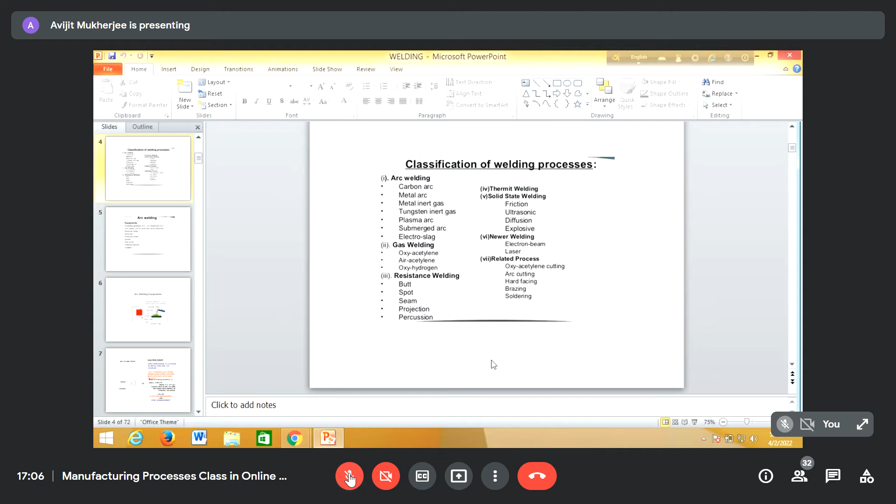Before discussing, I would like to mention that in the chat box I am writing the names of books. All the books of manufacturing processes, as I had mentioned earlier, contain welding, but there are some good books only for welding, right? H.J. Little is one of the good books.

Then again, Welding Technology by J. Davis. And another good book, Welding Technology by Parmar. So there are three good books on welding, along with many others. But for the time being, you may not go through Parmar, because Parmar is basically mathematical. There is various welding mathematics related to welding current requirement and so forth. So Parmar we shall not discuss in detail, because that is beyond our scope at the present moment.

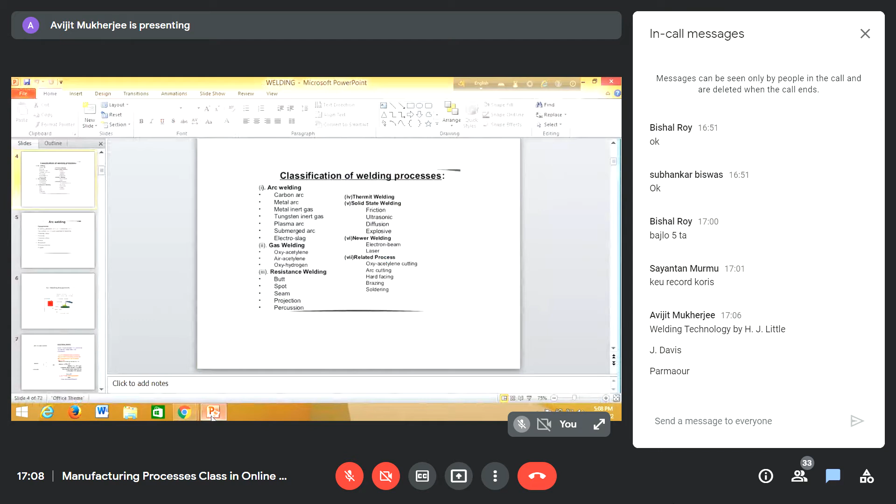Now we are again returning. So I think this slide is available. Are you getting it? Yes, sir.

So we had mentioned it not in a tabular form, but just observe the arc welding. Previously we had discussed gas welding, number 2. So what are the different techniques? Oxyacetylene, oxyfuel. So in oxygen-acetylene, acetylene is the fuel; in oxygen-hydrogen, hydrogen is the fuel. Oxygen is a supporting gas; oxygen supports combustion. If we don't have oxygen, air may also be used, but that is not good quality. So this is oxyfuel welding.

Electric resistance welding. We had discussed spot, seam, projection, butt, and percussion welding. Percussion means flash butt welding. This is what is known as upset butt and flash butt. Now there are many other related processes. This is not welding, but utilizes the oxyfuel flame. So what is that? Cutting. Related process means instead of joining, cutting is initiated, basically for ferrous metal, as we had mentioned yesterday.

So oxyacetylene cutting, or we may also have arc cutting, brazing and soldering. We shall not discuss arc cutting or hard facing for the time being. Brazing and soldering are again joining processes, so that will be discussed. Some newer techniques like electron beam welding, laser beam welding, then solid state, these are also newer: friction, ultrasonic, explosive bonding, diffusion bonding, all these are various advanced technologies. Then submerged arc welding, those will be discussed.

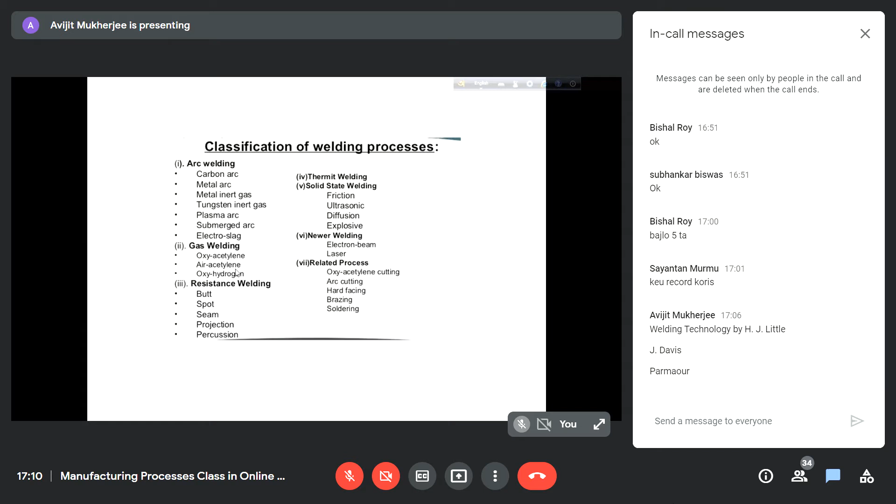Now for arc welding, perhaps you are at least familiar with arc welding, because during your laboratory, most likely in the first year workshop, or in second year first semester, there was a workshop on welding.

Yes, sir. Second year. Second year, first semester. First year first semester? No, second year, sir. Second year, first semester. Okay. So welding was discussed at least in theoretical mode. In online mode, yes. Online, but I think arc welding was discussed.

Yes, yes. Now, in that case, arc welding.

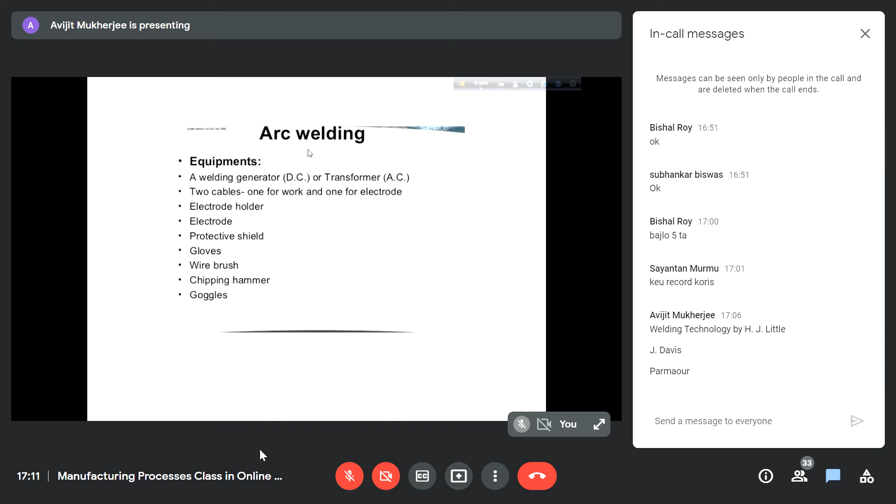So again, as we had mentioned, heat source or heat is a basic minimum in case of welding, right? So in arc welding, how is heat generated? Again, as the name suggests, electric. This is arc, obviously obtained from electrical sparks, right? And in using electricity, we may have electric resistance welding, where the concept is something different: heat is H equal to I square RT. But here, how heat will be generated, that we shall discuss.

Again, as it is an electrical source, we may have either a DC set. What is DC? Direct current, right? And one is a transformer, AC transformer, alternating current, where there is no fixed polarity. Alternatingly, plus minus, these polarities are changing. But in DC, direct current, there are two fixed terminals, positive and negative. They are not changing. Okay, and how heat will be generated, all these will be discussed.

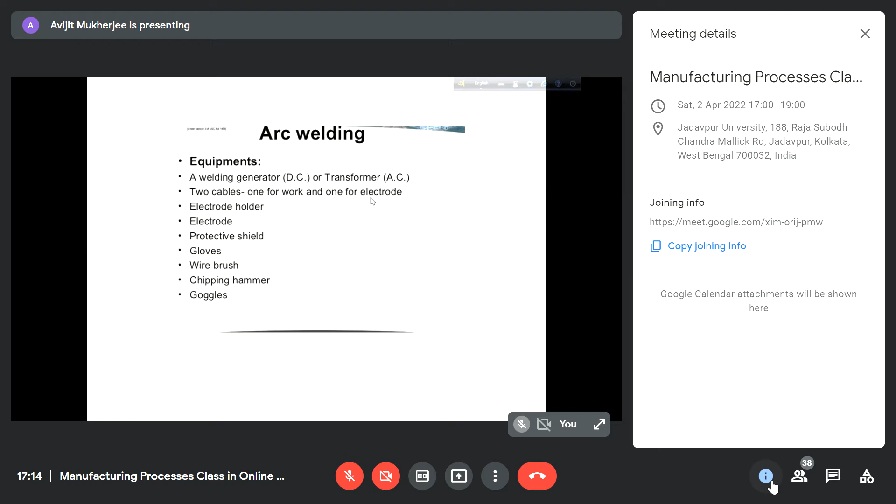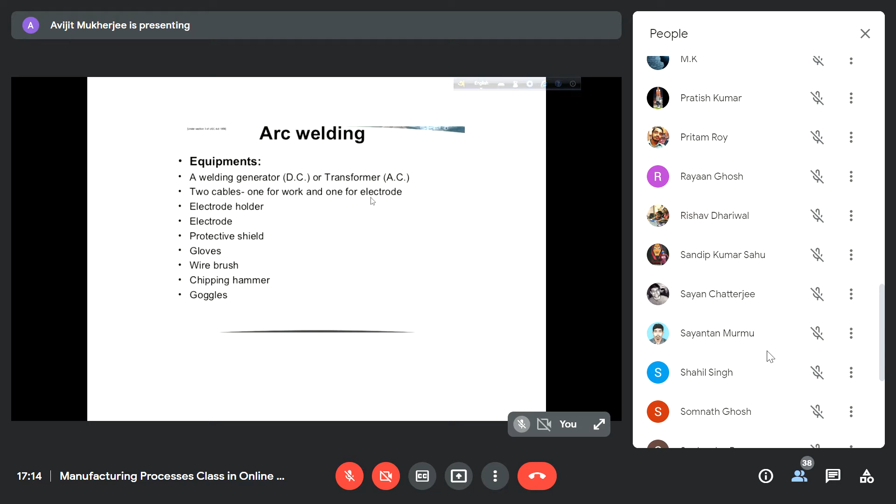Now here the concept of electrode is something different, not the positive terminal or negative terminal as the concept is utilized in electrical energy. But electrode in arc welding particularly, and sometimes in gas welding also some electrode rod is used, is nothing but filler metal. As we mentioned yesterday, we may require some additional material to be deposited, depending on the gap between the two pieces, which depends on the edge preparation. Edge preparation depends on the strength requirement or types of joints, geometrical shapes, sizes. So here electrode is that extra filler material. So we require two cables, one for the electrode and another for the work materials.

We must have an electrode holder, because the job will be held on a work table. Jobs will be clamped. You need not hold the job using any tongs, but the electrode should be held manually. If it is robotic welding, obviously robotic arms will grip all these. So as we require an electrode cable, we must have the electrode. These are also very important devices in welding.

These two, protective shield and gloves. This protective shield is a blue glass through which you should observe the welding, because you should not look directly at the weld area, particularly the arc weld area, with your naked eyes. Why? Because the rays generated are very dangerous. They contain ultraviolet rays, infrared rays, which may damage your retina. So the protective shield, also known as shielding glass or blue glass, is a specially prepared glass. Not only is the color blue, but it is specially designed so that X-rays, UV rays, infrared rays can't penetrate.

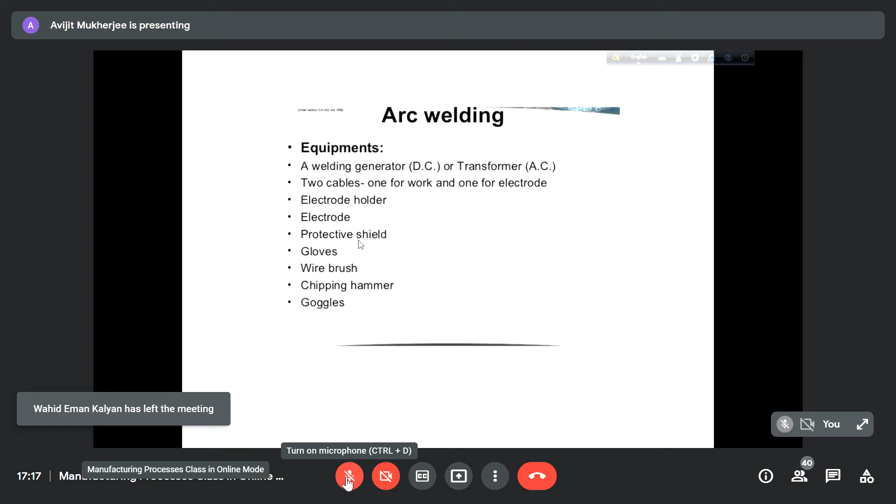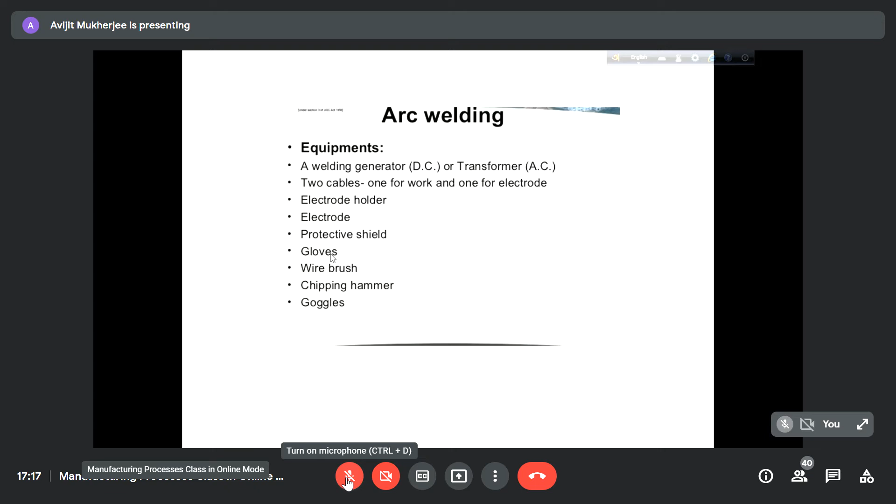And gloves are also used, and aprons, because sometimes you may feel an electric shock, though there is a minimum chance. Why, we shall mention again, but gloves should be used. Also there are various burrs and corners, sharp edges of metal pieces. So gloves are an essential minimum. And in welding and fabrication industries, where welders are operating continuously throughout the day, they must wear apron, gloves, all these.

If you visit some fabrication industries, you will observe, just like in today's COVID scenario where doctors are all the time wearing PPE, personal protective equipment, with all body parts completely covered, similarly in welding and fabrication industries all the body parts of the workers are completely covered.

Why? Because due to arc welding or any other welding, various fumes and gases are evolved. Not only the rays, red rays, X-rays, UV rays, but also obnoxious gases are formed. That is very harmful not only for the lungs but also for the skin. Prolonged exposure to those obnoxious gases may harm your body, even skin cancer. It may lead to various allergic conditions, irritations, and even cancers. So that's why protection in the welding industry is very, very important.

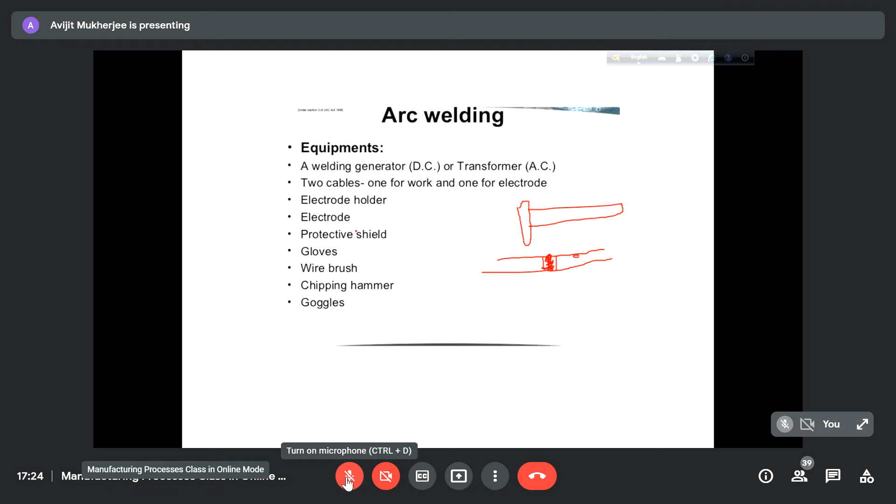So after cleaning, chipping and removing these fragments, go for the second pass. Again, break the chips. Again, go for the third pass. In this way, depending on the section thickness or strength requirement, a number of passes may have to be given. And every time a single pass is done, it should immediately be followed by chipping. Why? To remove the oxide scales. That's why the chipping hammer, goggles, protective shield are required, all for protection.

One cable is connected with the electrode. This is the electrode holder, and on top there is an electrode. Electrode means a rod. This may be a bare wire, meaning without any coating material, a bare wire electrode. Or generally some coating material, flux coating, is used on the electrode; we shall discuss it in detail. Just like agarbati, dhoop, which you are familiar with: the bare wire is the wooden stick on which coating material is deposited. This is the electrode,

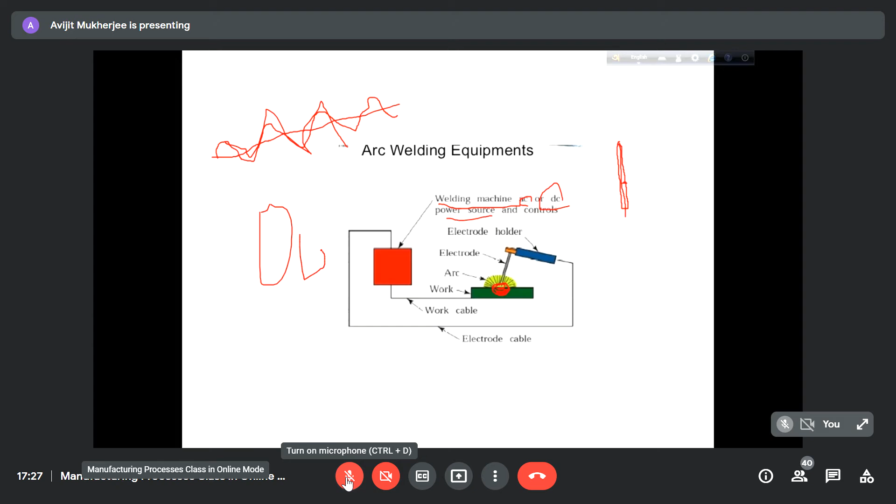Like in gas welding, we have two cylinders, one oxygen cylinder and another acetylene or other fuel cylinder, two hoses, a mixing chamber, and either a cutting torch or welding torch. This is ignited and heat is generated. But here, this is the scheme.

Now, question is how, as in the previous slide, we are observing some arc. So as soon as these two cables, or say work and the electrode, are struck and immediately separated by a small distance, air gap. Are you getting what I would like to say? Say this is the workpiece and this is the electrode. So they are just struck, touched. Okay, struck. Yes, sir. And immediately make a gap, air gap.

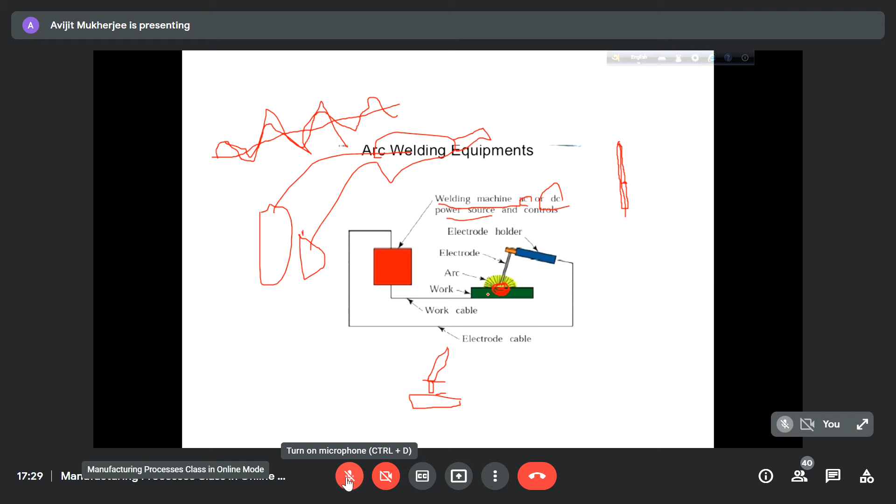So through this air gap, arcing will be established, arcing will be continued, arc will be established, right? Yes, but sir. Question is how this arc is established. You are striking the two electrodes and immediately separating the electrode, maintaining a very small air gap through which arc is established. Now, there are various theories behind this.

One theory is electrical theory, which is not shown here, but say this is the second theory. First theory is electrical theory, not electron, electrical theory. Okay, electrical theory. And another is electron theory. Now, in electrical theory, first one, though it is not mentioned here, you go through any books, you will understand. Now, in electrical theory, what is happening? What is that theory?

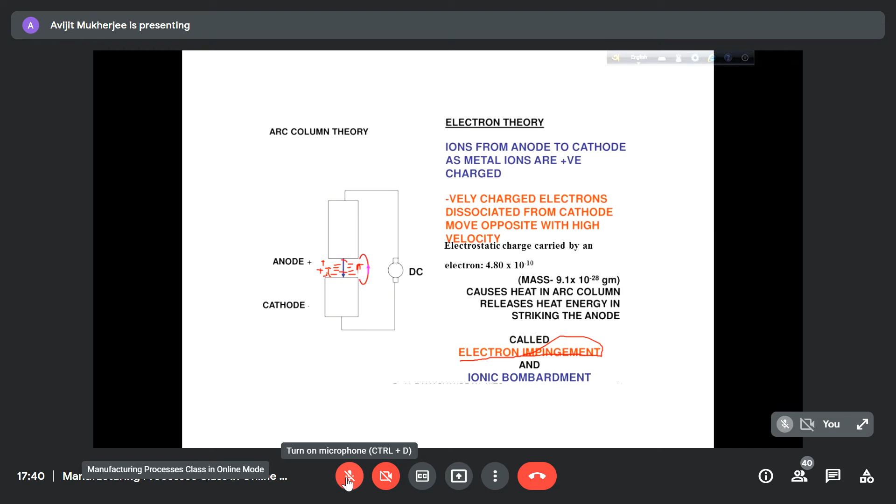Similarly, some ions will also be liberated, comparatively lesser in number, at the anode surface, and being positively charged particles, they will be attracted towards the cathode surface, creating the outer envelope, outer path. This is the inner column, electron column, and this is the outer envelope. They will also collide, also traveling, also attracted, also colliding with the cathode surface.

And this collision, ionic collision, is named ionic bombardment.

Now this is the science. Now, how is heat generated due to this? Electrons have a very small mass, 9.1 into 10 to the power minus 28. When they are attracted or traveling with very high velocity, and are colliding, then this kinetic energy is given, for a single electron,

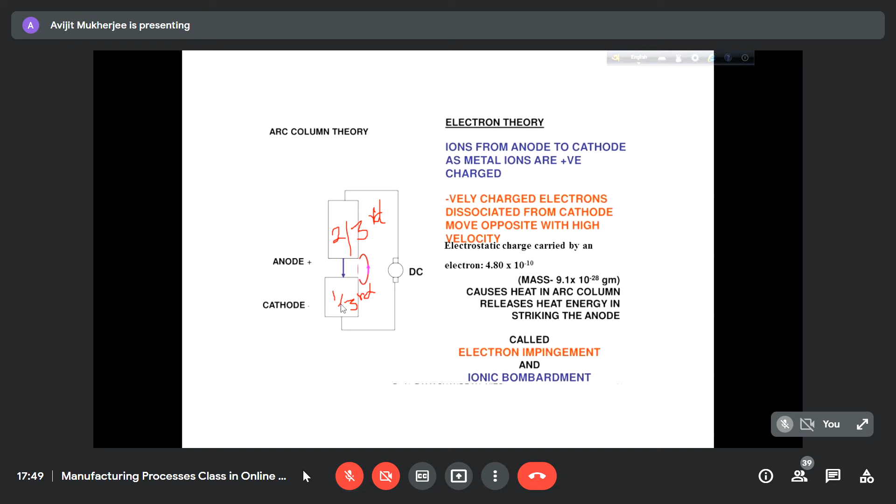Based on this, say this is the work, a job, and the job is connected with the positive terminal, positive pole. Say this is the positive terminal of the DC and this is the negative terminal of the DC, and the electrode is connected with negative polarity, negative pole. Okay, this is the job or work, and this is the electrode.

Now if these are the terminals or polarity, job is connected with the positive pole, that is anode. Electrode is connected with the cathode terminal. So where will the maximum heat be generated? On the work surface. If maximum heat is generated on the work surface, what will happen?

Metal will be melted at a rapid rate, right? And as soon as the metal is melted, the electrode will also be melted, getting the heat, and the droplets will be deposited here.

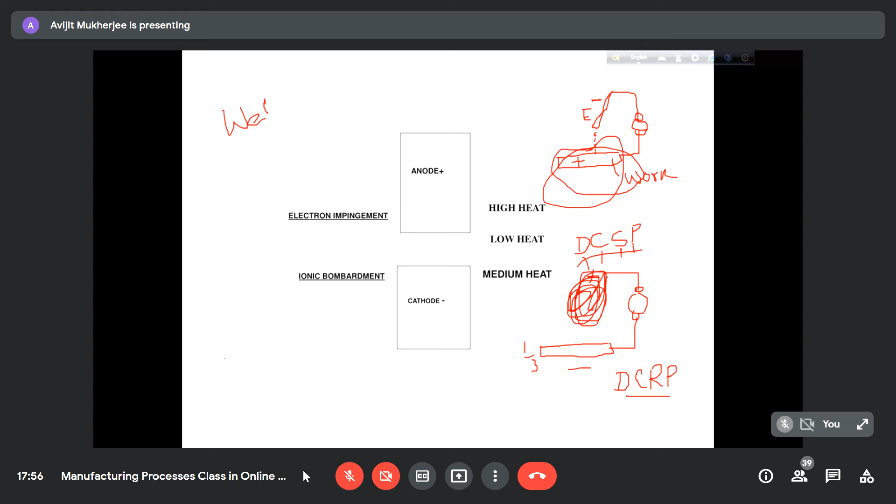There is another concern, that is weld position. So what is weld position? There are various weld positions, like vertical, horizontal, floor, also called flat, and roof welding.

Say this is a surface, a wall. So this is the floor, a three-dimensional view, this is the room. So I am welding on the wall vertically. So that is vertical welding.

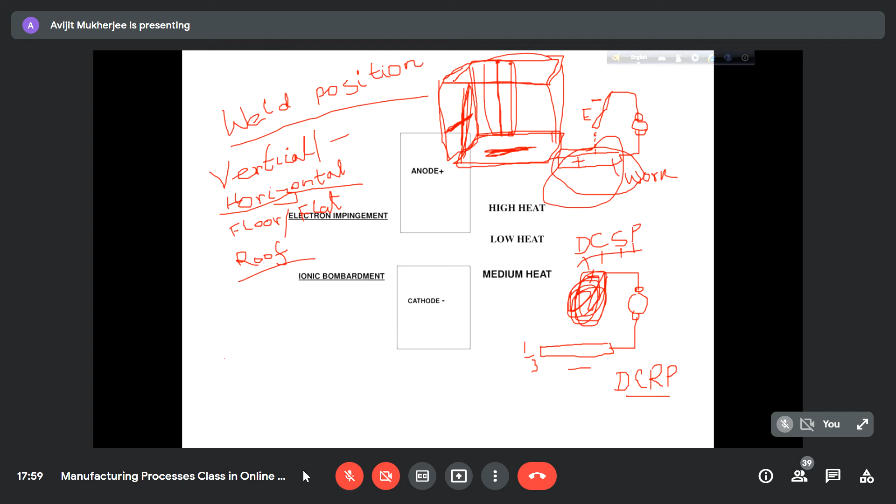This is the roof. You just observe your roof where you are sitting right now, look in upward direction, your roof is there. And a crack has been initiated at the inside roof area. So how to weld here?

If you connect your roof with positive terminal - say metallic room, the roof is connected with positive polarity terminal - maximum heat will be generated on that surface, and massive melting will take place, and the total metal will immediately come down due to gravitational force of action. Nothing will be deposited; metal will be deposited very slowly, very difficult.

So what is the suggestion? It is suggested if sometime roof welding is to be done, then tilt the object in an upside down manner. Are you getting the point? Tilt the object upside down - now it is like horizontal or flat, so things will be deposited very nicely.

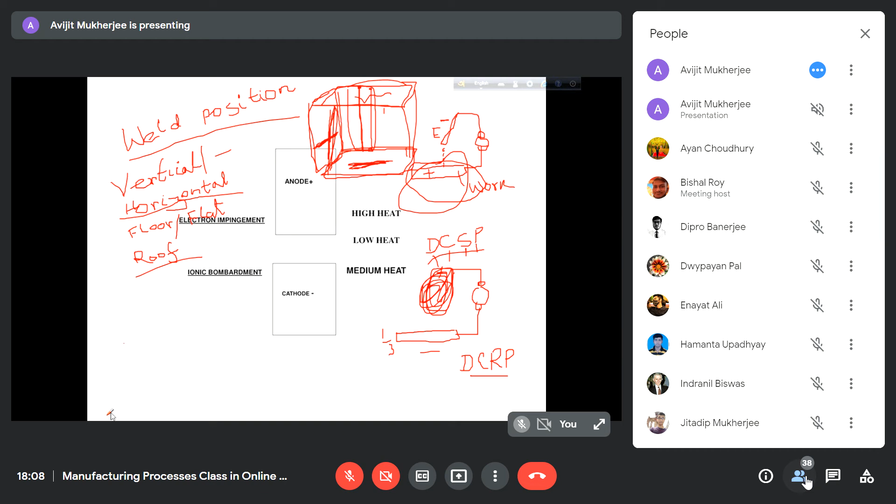But the only advantage is that in a very sophisticated factory, you may have all sorts of facilities, power source, all these. Still, you may have to use a motor generator set when the question of polarity is concerned. That is the only technical advantage of using a motor generator set. If it is connected with roof welding, you must go for a DC motor generator set. Or for thin foil, large thickness of job, high melting point, you can't avoid it. So these are the advantages as well as limitations.

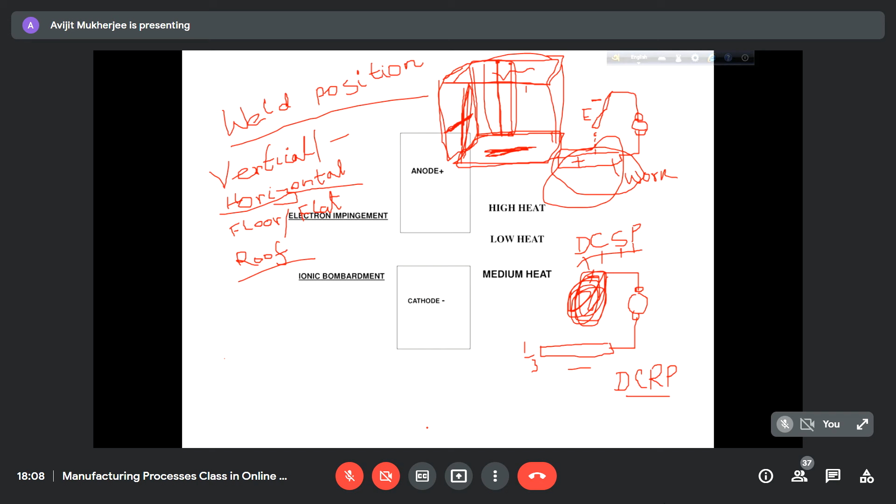Only 1 minute, I just am.

So these are the advantages and limitations of AC and DC motor generator sets. Here, what are the advantages? DCSP, DCRP. So this is the major advantage of using a DC set, along with many others, all self-explanatory. So go through any book and distinguish between AC and DC welding power sources.

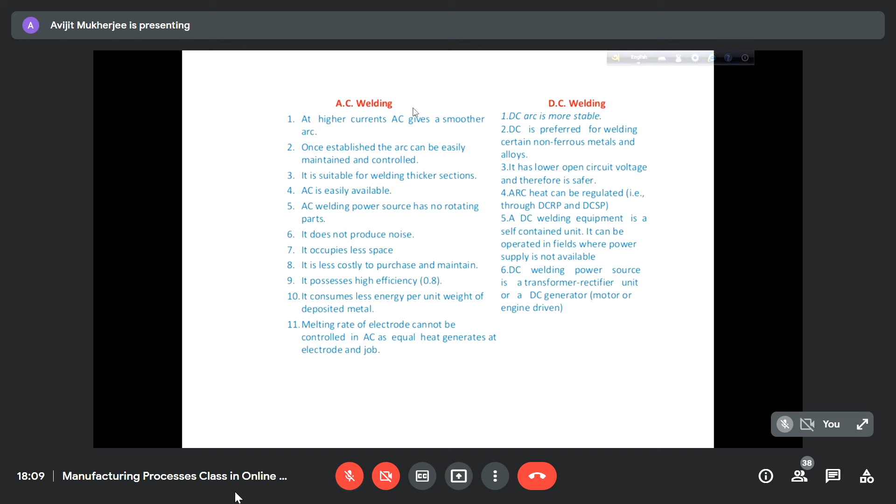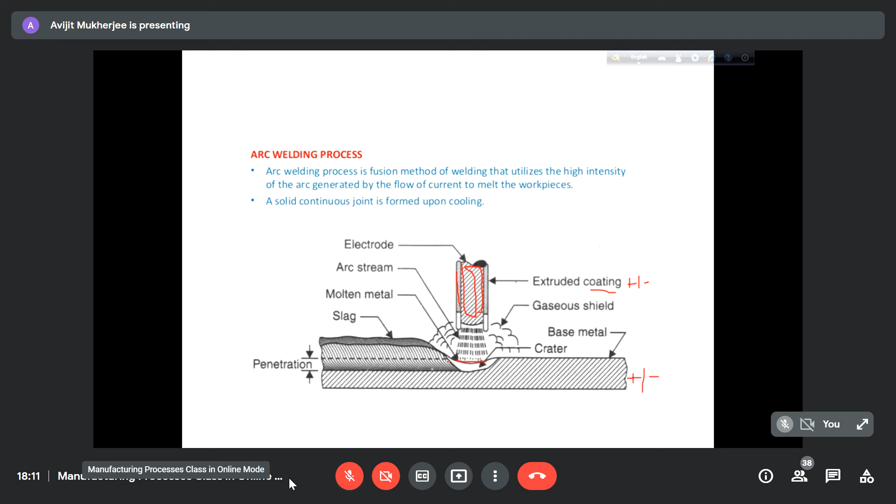And due to this arcing, a tremendous amount of heat will be generated, and by digging action the metal will be melted and a crater will be created. And molten metal will be deposited. This bare wire, a metallic rod, will also be melted and deposited in this pool, in this crater. So this is the molten metal deposition. Gradually, this thickness will be enlarged,

and this pool of molten metal, the crater, is covered by a gaseous envelope or shield. Why is this gas evolved? Due to the burning of the coating material. So gas will be evolved, and it will create a protective envelope. This gas shield is also very important. As this shield creates a barrier, heat will be dissipated from the crater or molten pool at a very slow rate.

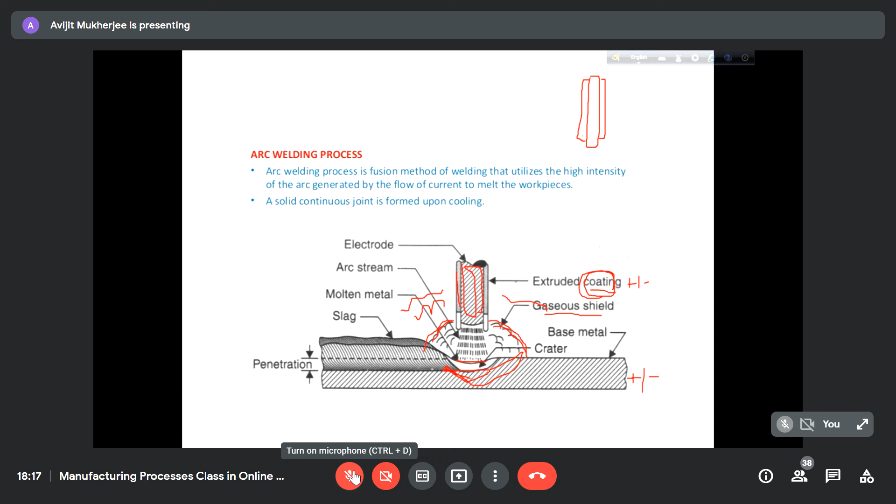So if the molten metal is unprotected, then immediately oxide layers will be formed. In atmospheric air, so many contaminants are there. Nitrogen, sulfur, oxygen is obviously there. So all the contaminants will make a scale, which is known as dross formation, SOx, NOx, oxide layers. So as this shield or barrier is created, atmospheric contamination will be reduced. So there are three-tier advantages of using a flux material.

Okay. One minute. Here it is not written anyways.

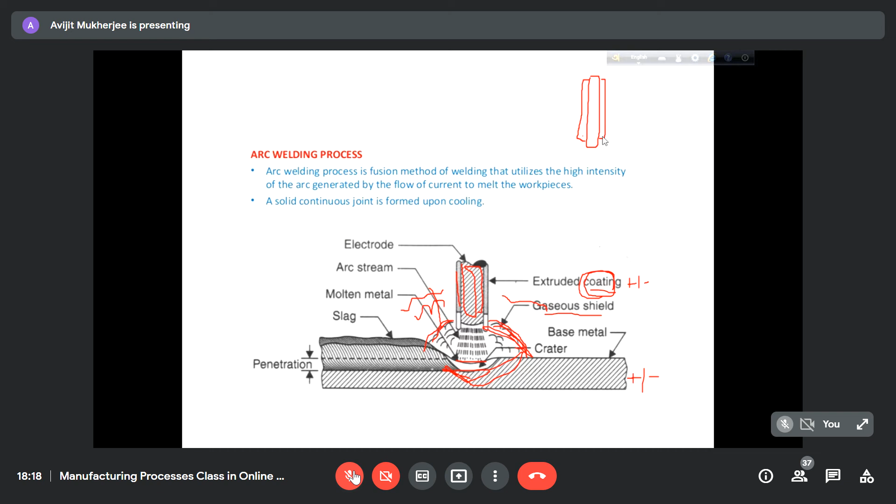Okay, I am just writing. This is electrode, right? This is bare wire, coated with some coating material; these are the coating materials. So I am writing here in the chat box what are the flux materials. These are the FLUX, flux. Various materials may be used like

ferromanganese, silica flour, asbestos, asbestos clay. So these are some flux materials that are used as a coating, and all these ingredients are bonded by sodium silicate liquid-based binder. You know this thing.

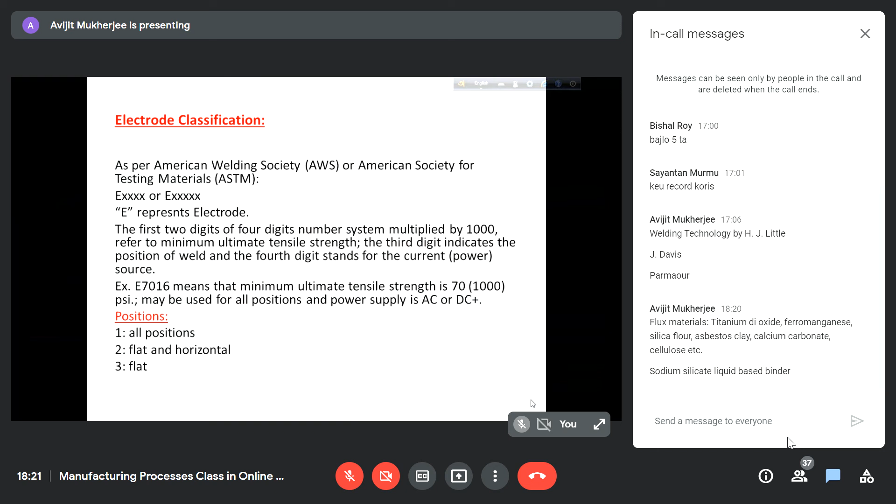There are several standards to classify, but we follow American Welding Society. These are very common: American Welding Society or American Society for Testing Material. You should know this abbreviation, that is AWS, American Welding Society, or American Society for Testing Material, ASTM. What is ASTM? If somebody asks you, American Society for Testing Material. And they classify electrode like this: E followed by 4 digits, or E followed by 5 digits.

E means electrode. E stands for electrode. And in a 4-digit system, the first 2 digits multiplied by 1000 refers to that much of minimum ultimate tensile strength. One example, say if I write E7016, what is the meaning? This is a 4-digit representation. E stands for electrode, and first 2 digits 70 multiplied by 1000, that is 70,000 psi, pound per square inch. That is the ultimate tensile strength that is expected when the joint is prepared with this electrode.

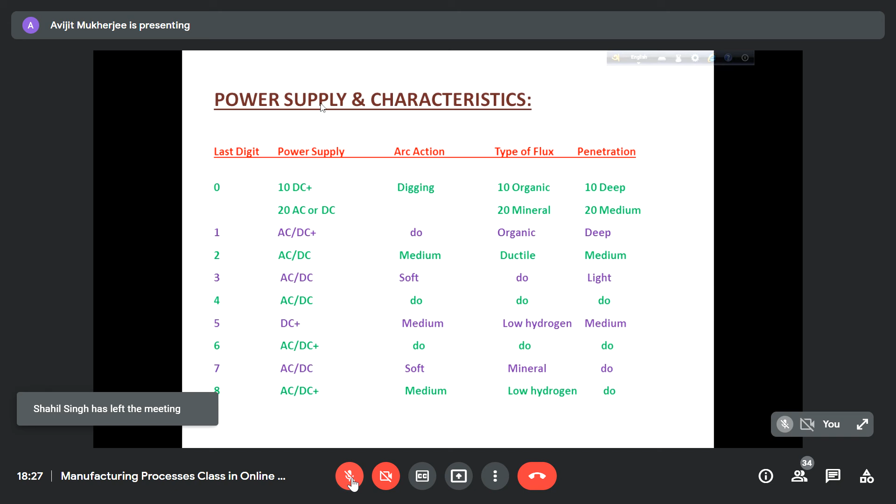Similarly, so many things. Say if it is DC positive terminal, digging action, digging means more melting of the crater, flux, organic flux or mineral flux, penetration, deep penetration or medium penetration, etc. So this is a table regarding power supply. So you should remember at least 1 or 2. If in a question a short note is to be written or some part is coming, then you should at least give some example. So you should remember at least 1 or 2 figures.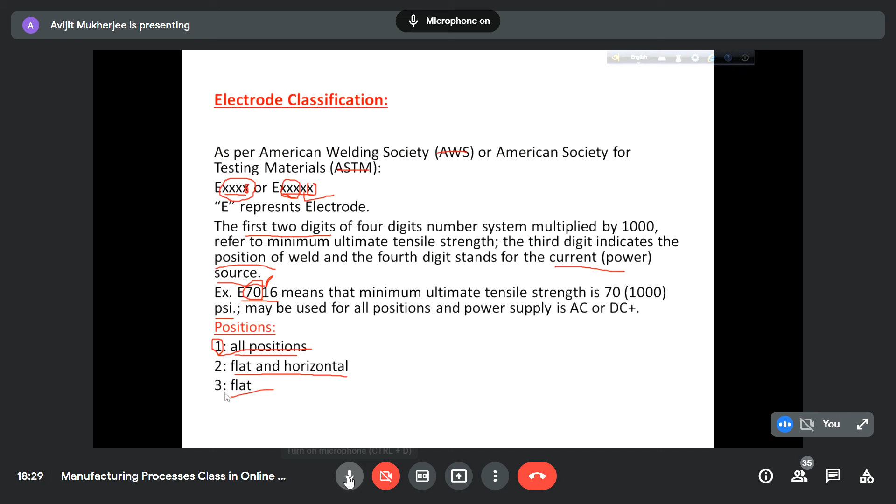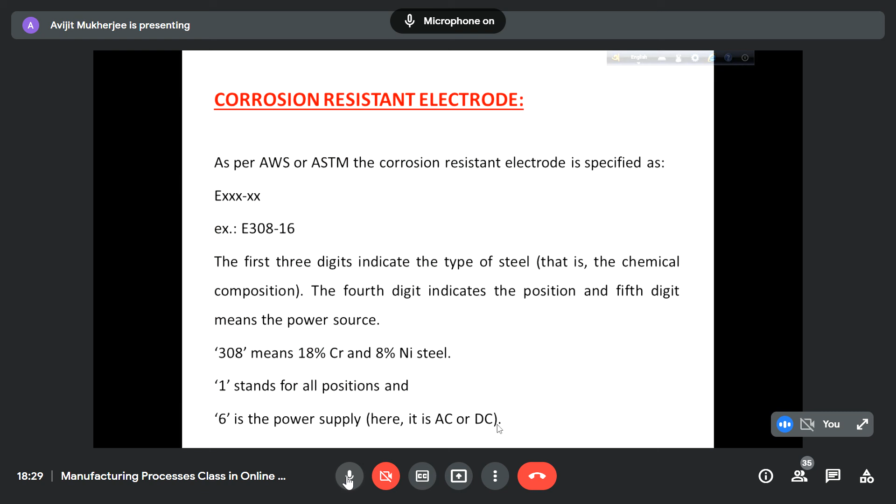Turbine blades are also enriched in chromium. And 1 stands for position, this 4th digit. Again, it is the position. We have mentioned 1 means all position. So here also position, all position. And 6 is again the power supply, AC or DC power plus. So in this way, these are the electrode specifications.

And another important concept is there in connection with welding: the nameplate of the welding machine, AC transformer or DC motor generator set. There is a plate which indicates the name of the factory, date, number, all these. Along with that, there are 3 parameters mentioned. That is amperage, voltage, and duty cycle.

This duty cycle is very, very important in welding because it is not possible to weld at a stretch for even 10 minutes. If you have a computer, or as we are doing right now, we are continuing for 1.5 hours, another hour can be continued without that much fatigue. But a welder can't weld continually for 2 hours, never. His eyes will be fatigued, his hands will be fatigued. So here a concept of duty cycle has been introduced.

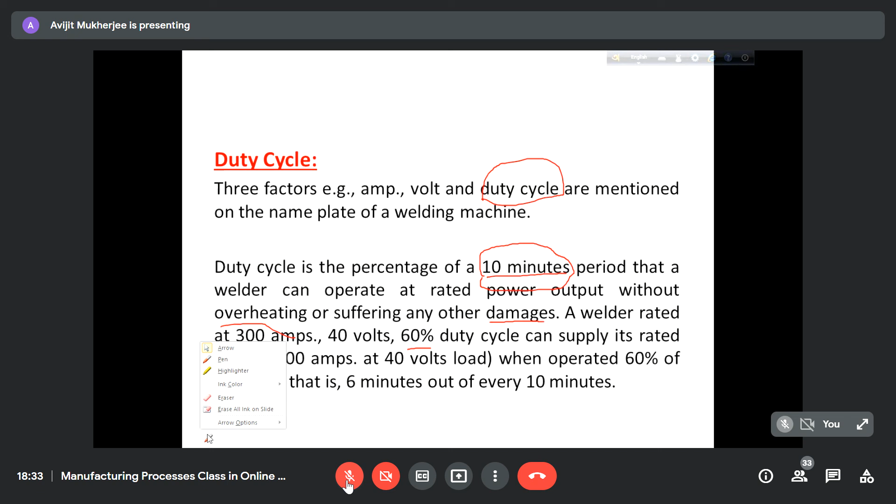Another factor is very important when arc welding is considered. 3 factors are very important: number one, speed of travel of the electrode. Second is voltage. This is approximately 14 to 24 volt for bare wire or lightly coated electrode. But this is 20 to 40 volt for semi-coated and coated electrode. More voltage is required for coated electrode.

And another parameter is amperage, that is current. Usually this is up to 500 ampere for manual operation. And because a maximum of 40 volt and only 500 ampere is used, we are not feeling any shock. Low volt operation.

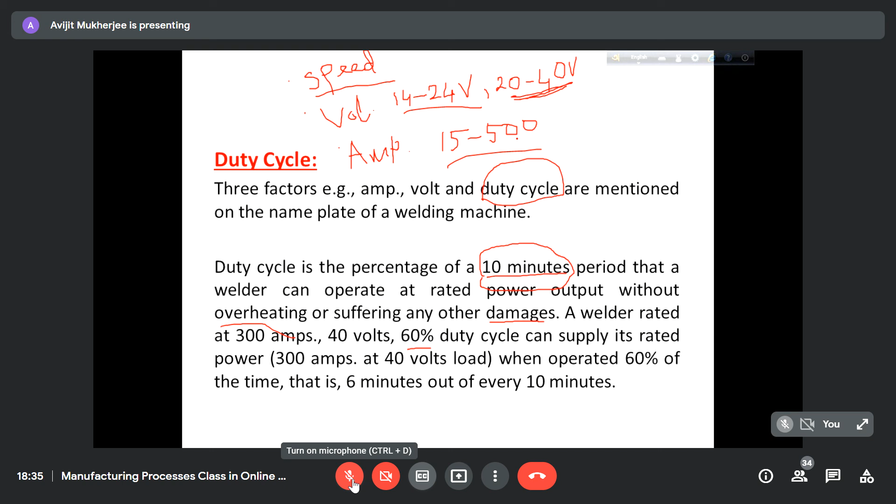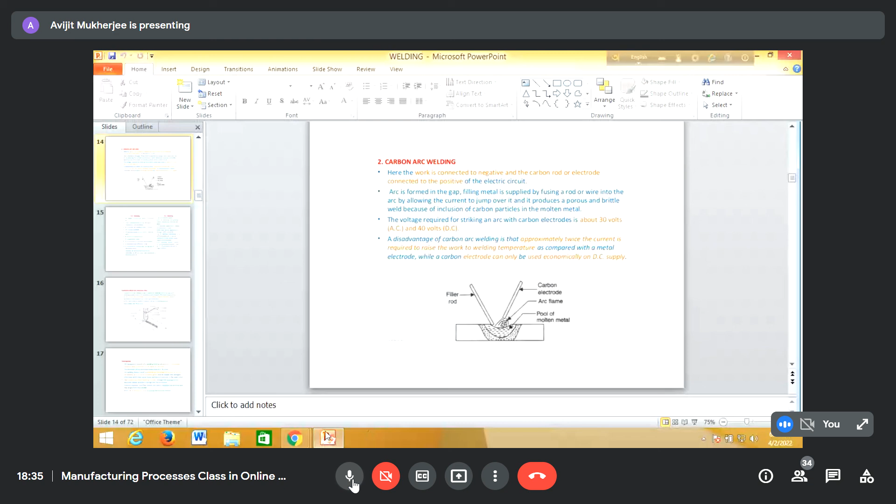Right, sir. আচ্ছা, এখন কটা বাজে? Do you want to have some break or should we stop? What do you suggest? Hello? হ্যাঁ স্যার একটু ব্রেক দিন স্যার। ব্রেক করে আরেকটু এগোনো যায় নাকি? ইয়েস স্যার। তাহলে 5 minutes? ওকে। So right now this is 6:35. So we shall return at about 6:40. Is that okay? ইয়েস স্যার। Okay, sir. Okay.

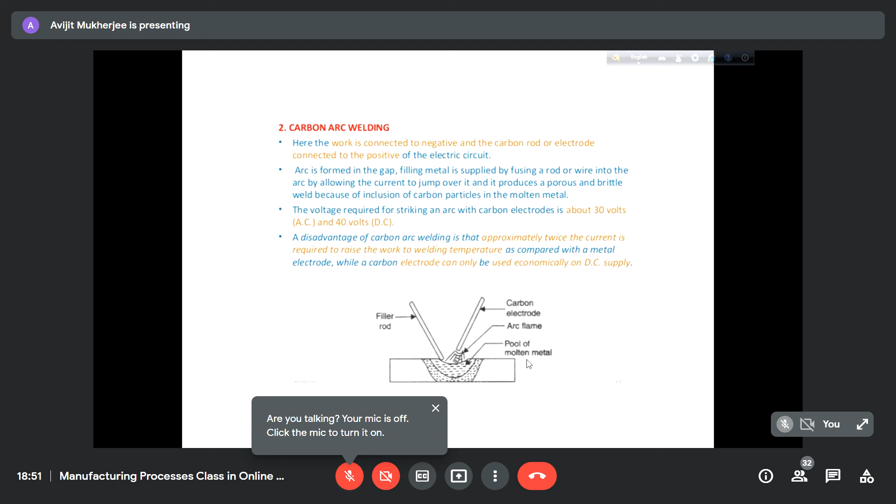When carbon rod is used as an electrode, carbon will be infused in this molten pool of metal. And as carbon is infused in the weld pool, this will become porous and brittle, right? So if carbon is infused here, the weld pool will become porous, and it will be brittle also. But this is the technique, that is carbon arc welding. This is already mentioned, the differentiation.

Now another two, TIG and MIG, you are also familiar with TIG MIG. Though these are also like carbon arc welding, not that new, but still they are considered as advanced welding technologies. So what are the other advanced welding technologies? Like laser welding, atomic hydrogen welding, electron beam welding, friction stir welding, right? Similarly, MIG and TIG welding.

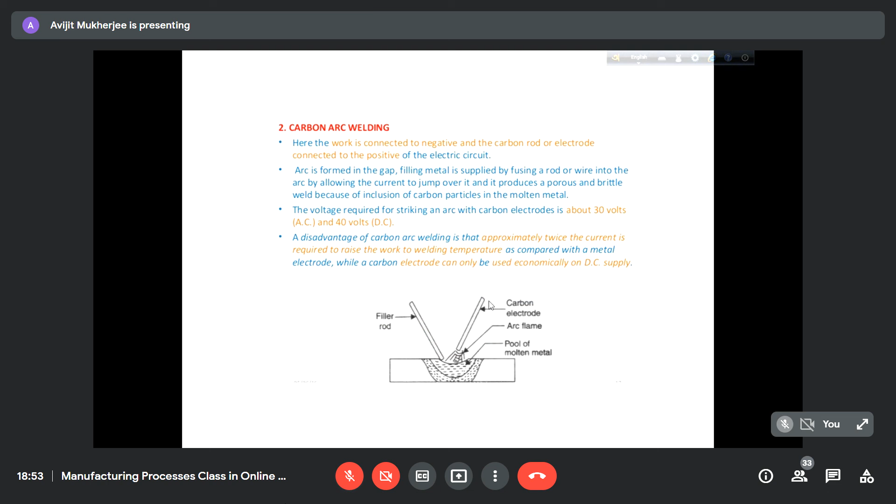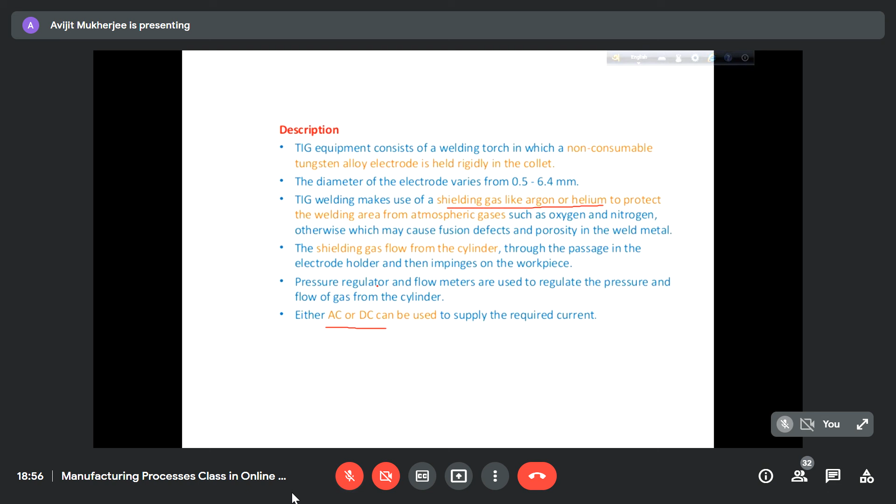So these are some technical points, pressure regulator, etc. So you just go through any book systematically, jot down some points, and also draw the figures, good figures. Try to practice good figures.

And another TIG, tungsten inert gas. Another concept is MIG, metal inert gas. MIG, not TIG, MIG, metal inert gas, any metal other than tungsten. And here, this is a consumable metal, consumable.

Now, what is the difference between an ordinary electrode? Here it is covered, or it is working in a gas shield envelope. So that's why inert gas, metal inert gas, but in an ordinary electrode there is no inert gas. That is working under atmospheric air.

And here it is also written as GMAW, just like say GTAW, gas tungsten arc welding. This is also known as gas metal arc welding, or MIG, same thing. And here a bare wire. So there is a reel feeder.

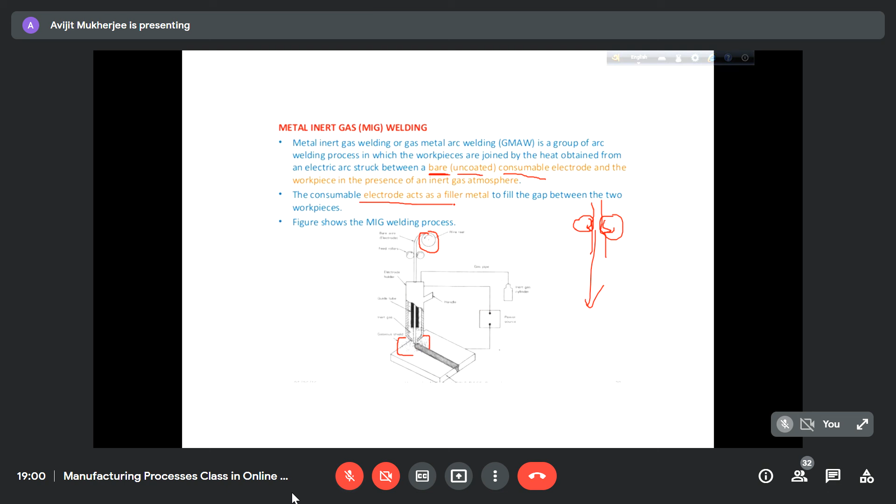So this is a power source. And the electrode is a bare wire, bare or uncoated, and also consumable, not non-consumable tungsten. So here no filler metal is needed, because the electrode itself acts as a filler metal. But in TIG, we supply one filler metal. So these are some technical points.

Mixture of argon, carbon dioxide, or only argon, only carbon dioxide. All these are the research work. Mixture of 75, 25, 80, 20, which will give the good result.

And you should know the electrode, what is used not only here, everywhere. The bare wire, that is the electrode, it should be such a material which is almost the same, or nearly the same. Same means chemical compositions are almost the same as that of the base metal. Otherwise, mismatch will be there.

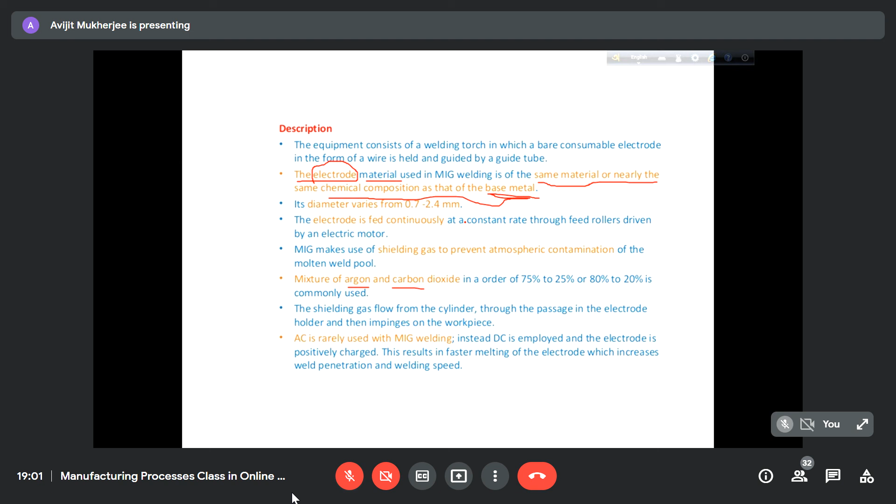Now, another interesting point. We have mentioned about arc welding. We have also mentioned about metal inert gas welding, where inert gas envelope is created to protect the weld pool. But the spatters are coming, sound is coming, heat radiation may be there. So to protect all these and also to provide the envelope, shielding medium, another concept emerged.

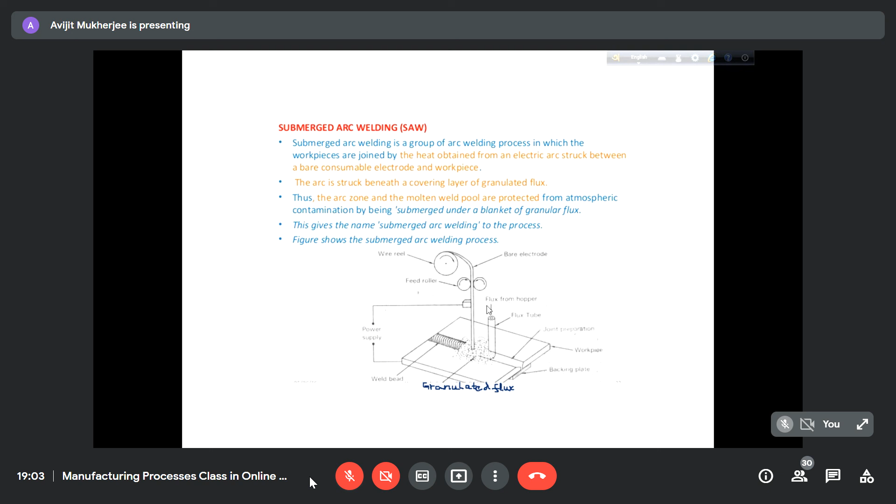On the contrary, here you just observe a flux tube, where from some flux material, a flux hopper is there, flux material. Now, what is flux, that we shall discuss.